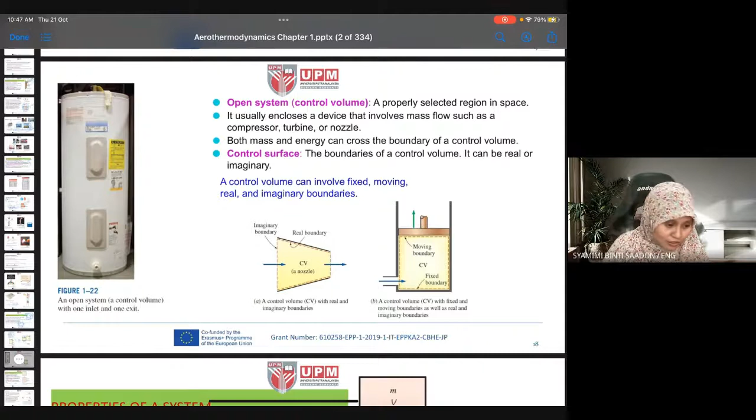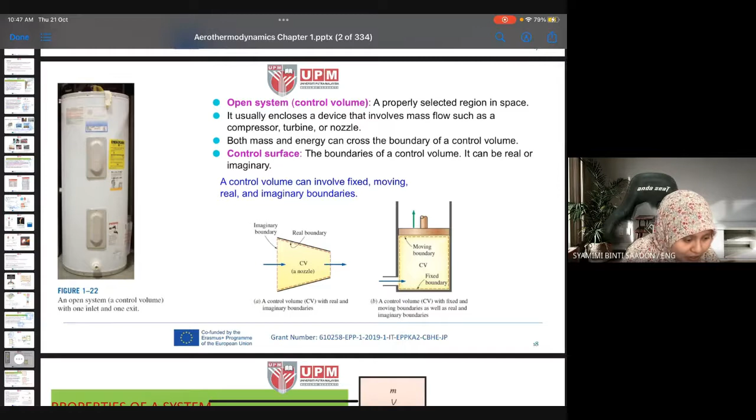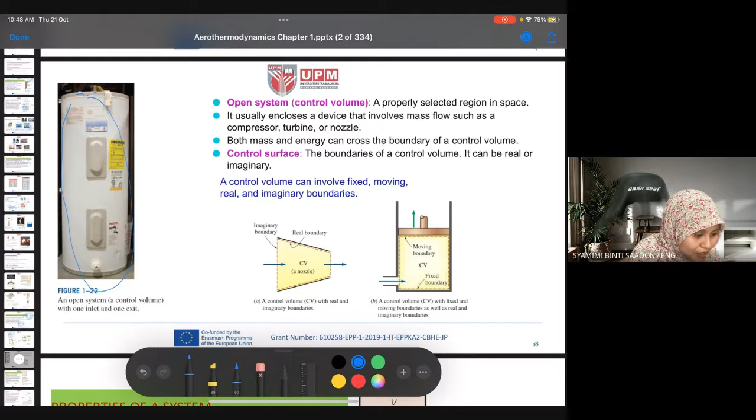So we continue about the open system. Open system is a control volume or properly selected region in space. I think this was already mentioned. For example here, what do we have? Like a tank, a gas tank. The tank is the system, but it is open, so we have to consider the change of mass fluid in and out of the control volume, one inlet and one exit. Means that if there is any fluid transfer, any mass, any particles, we have to take into consideration that part when we analyze the system problem. One inlet and one exit.

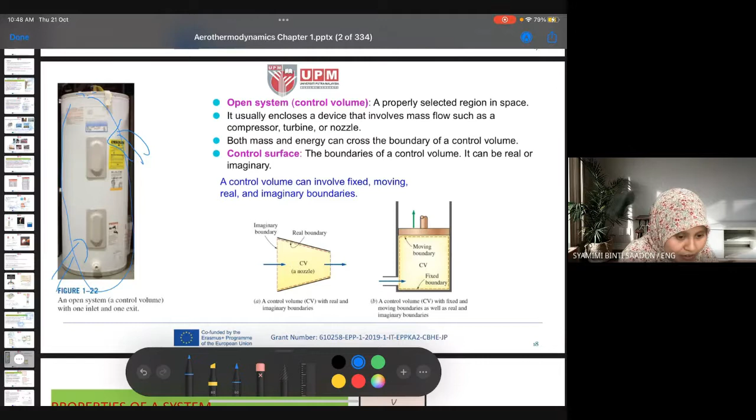And then mass flow. It usually encloses a device that involves mass flow such as a compressor, turbine, or nozzle. These are the main components in a thermodynamic cycle: compressor, turbine, nozzle. Even in aircraft engine cycle, gas power cycle, the main components are compressor, turbine, plus nozzle. Nozzle is to enhance the speed of the fluid to a high speed gas flow. So we need a nozzle.

So these devices, compressor, turbine, etc., are considered an open system, open control volume. Both mass and energy can cross the boundary of a control volume. So for an open system, both mass and energy can be exchanged, can cross. But for a closed system just now, only energy, no mass. Mass cannot be transferred or exchanged within the closed system. But for open, both mass and energy can cross the boundary of the control volume.

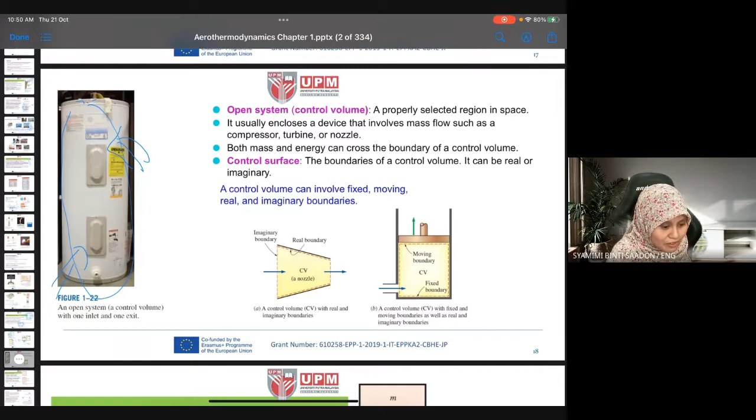And then we also call control surface the boundaries of a control volume. It can be real or imaginary. Control surface is same as boundary, just another definition. Control volume can involve fixed, moving, real, imaginary boundaries. These are examples: a control volume with real and imaginary boundaries.

For example, nozzle. Normally we design, sketch a nozzle like this, from a bigger initial area to a smaller area at the exit. Nozzle involves change of area, because if you remember the Bernoulli principle, if we change area, then the volume will change, the speed, the velocity will change. So that's why a nozzle has to have a different area at exit and inlet. So this is nozzle.

CV is control volume. And another one, B, for example, if you have a piston, for example combustion, a diesel engine, what do we call it? Internal combustion engine, CI engine, right? Internal combustion, ICE, internal combustion engine for a car, a vehicle. Sometimes it uses a piston engine.

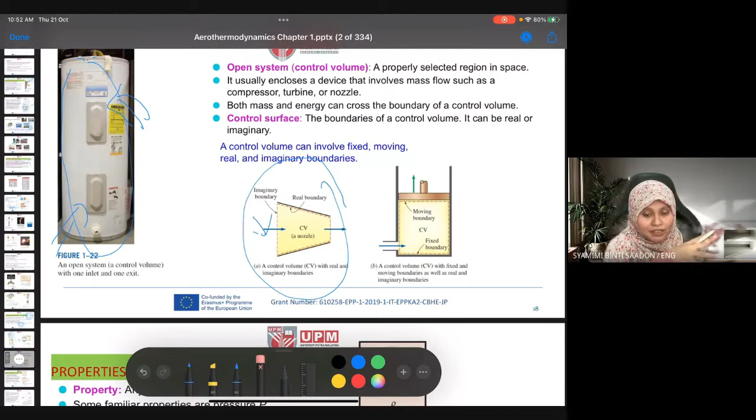And then properties of a system. This is also some of the units. So property and characteristic of a system. Some familiar properties: P, pressure, temperature, volume, mass. These properties or physical values that we are going to measure can be divided into intensive and extensive.

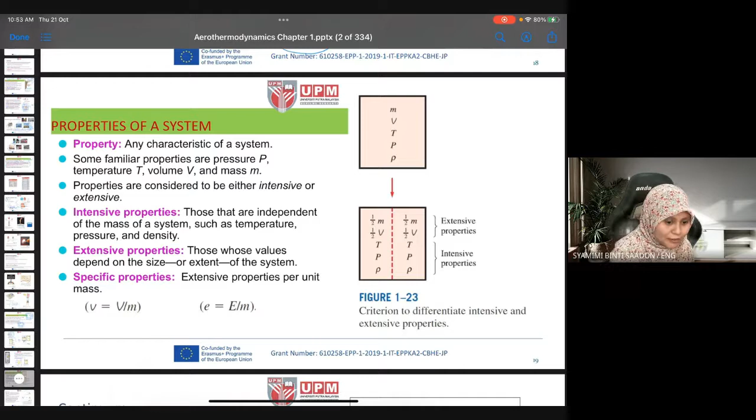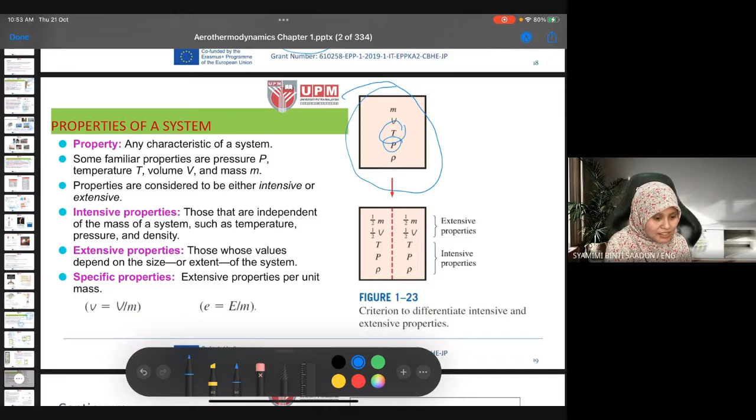This definition, at least you know it, but you don't have to remember. Intensive properties are those that are independent of the mass of the system, such as temperature, pressure, and density. While extensive, those values depend on the size of the system. So intensive: temperature, pressure, and density means that in a closed system, like a rectangular here, the temperature, pressure, and density will not change with the mass, meaning that if some of the mass is transferred out, some of the particles are transferred, the temperature, pressure, and density of this remain independent of the change of mass, while the volume and energy depend on the mass, extensive properties.

So there is another notation. When we write these extensive properties, we have to define whether it is in terms of mass, or it is the original default value. For example, volume here, if you write small v, it means it is in terms of mass, meter cube per kilogram. Otherwise, if you write capital V, it is just meter cube, centimeter cube, or milliliter.

This other value, enthalpy, you are going to use for first law thermodynamics. Enthalpy in small letters is joule per kilogram. But if you use big H, enthalpy is in joule. So these extensive properties are normally in terms of mass, per kilogram or per gram.

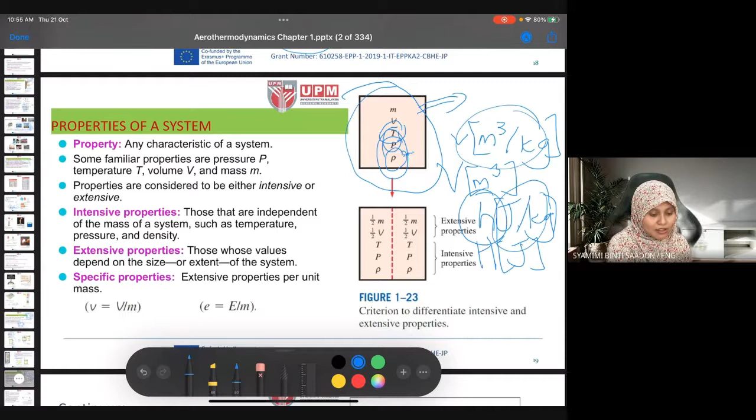So in our calculations we use a lot of this mass, these extensive properties. Normally the values are given in terms of the specific property which is in terms of mass.

If you have specific heat, CP, this is normally given in terms of mass, so we write it in small letter. The unit is joule or kilojoule per kilogram per Kelvin. But if it's in capital letter, it's joule per Kelvin. Normally we use the small letter version.

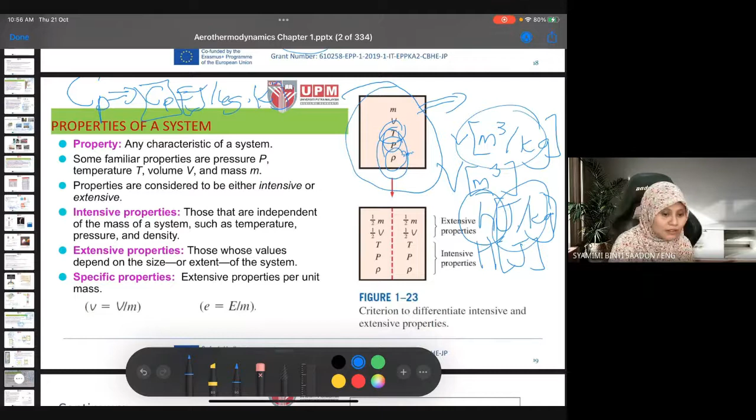This means that we calculate, measure, and analyze the system normally in terms of per mass, per kilogram mass. That's the normal calculation.

This one is okay, continuum, atom, let's pass. Sorry, I'll pass, maybe not really important for our topic.

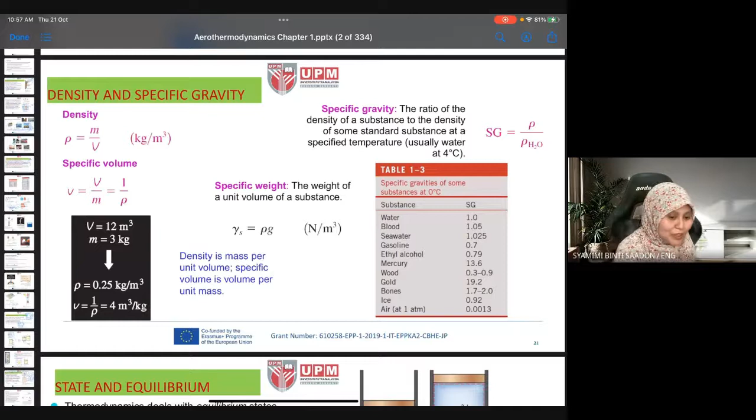Density and specific gravity. Density is mass per volume, kilogram per meter cube. And we call it specific volume when the volume is in terms of mass per kilogram. We write it as the small letter v, and we call it specific volume.

Specific weight, specific gravity, specific enthalpy, specific entropy - specific normally means in terms of per kilogram.

So this specific volume is actually the opposite of density, because it is written as volume over kilogram.

After this class I'm already getting confused. Okay, this is meter cube over kilogram, so this is the unit of specific volume.

So you can see this is actually the inverse of density. If you have the volume, for example, the problem or exercise gives you the value of the specific volume, you can calculate directly the density, just by taking the opposite, the inverse.

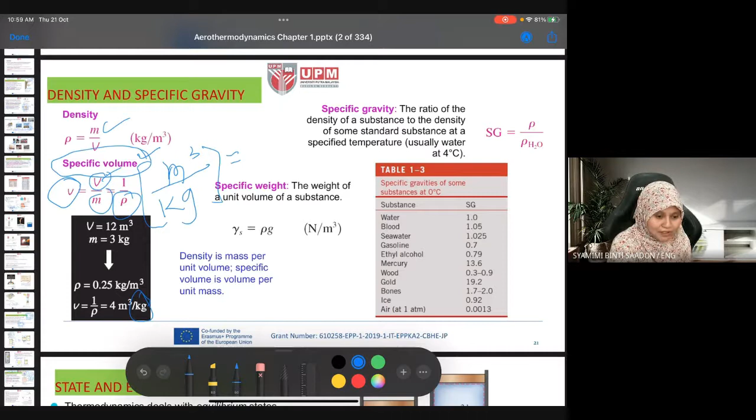Specific weight is the weight of a unit volume of a substance, written as gamma, but this is seldom used, we use it not quite often. Specific gravity is also rarely used, not quite often. Only specific volume is commonly used.

State and equilibrium. There are a lot of definitions for you today, but it's okay, it's just definitions. The most important part is that you know how to solve a problem. Definitions are just for your information.

State and equilibrium. Thermodynamics deals with equilibrium states. Of course, equilibrium is a state of balance.

So normally before we analyze a problem, like I mentioned, if you have exercises or exam problems to solve, you first consider: the system is what? What does the system include? It includes the piston, the cup of coffee, and the surrounding, etc. So that is the system.

And then you have to also state that the problem you are analyzing, the state or process, is in equilibrium, is in balance. Because otherwise, if we do not state and consider that the process is in equilibrium or in balance, you cannot apply some of the equations or principal laws.

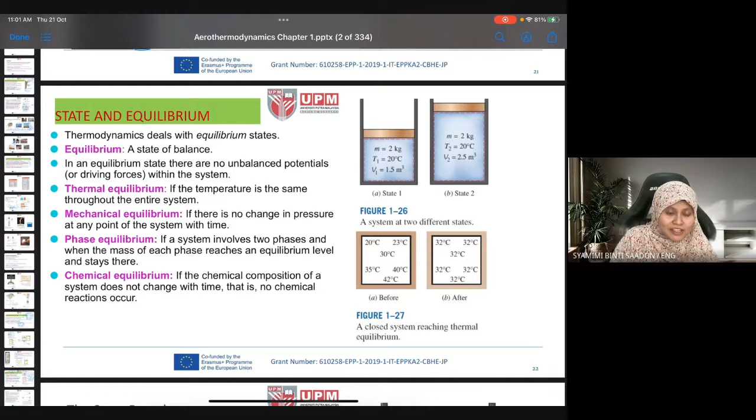If you don't state that, then other people may challenge you and ask whether there is a change of this or that in terms of the process.

But if you already state that the system is balanced, we understand that there is no change in, for example, the energy balance. There is no other system interfering. So you have to state that it is a state of balance. In an equilibrium state, there are no unbalanced potentials within the system. No unbalanced potential means that it is balanced.

Thermal equilibrium. So there is thermal equilibrium, mechanical equilibrium, phase equilibrium, chemical equilibrium. But normally if we state that the system is in equilibrium, we understand that thermal, mechanical, phase, and chemical are all in balance, so you don't have to state them one by one. Thermal equilibrium is when the temperature is the same throughout the entire system.

So when we say that we are studying the system where it is in equilibrium, we assume at a certain point, for example like this. Okay, you have to study again.

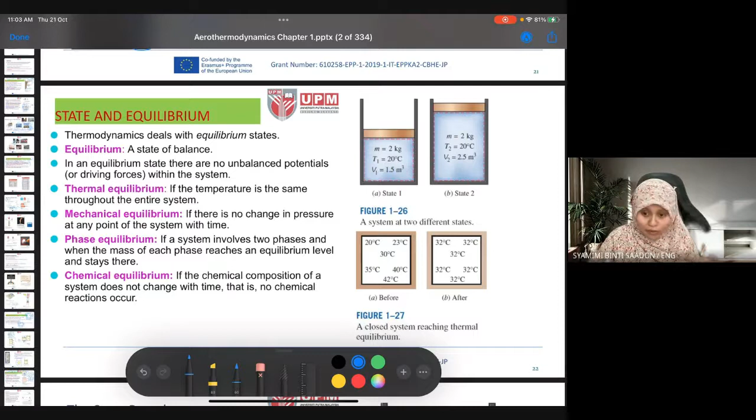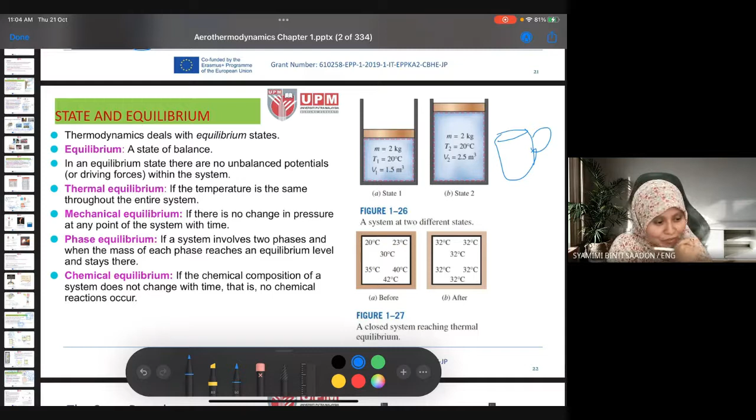It means that you have to state the period of time that you are going to focus on. Maybe the whole process of the phenomenon is throughout. Let me give an example: the cup of coffee. For example, you put the cup of coffee on a table in the living room for 5 hours.

But you want to calculate the amount of heat transfer from the hot coffee to the ambient, the surrounding room temperature. You want to study the process of heat transfer. Normally, in order to analyze the heat transfer from hot to cold, to calculate the total heat transfer between the cup and the surrounding, you have to define first that you are going to consider the process during maybe 5 or 10 minutes.

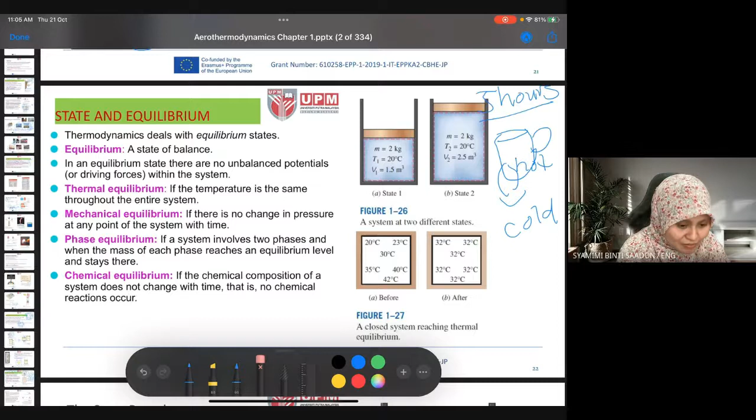For example, these 5 hours are from 8 a.m. to 1 p.m. You put the coffee on the table from 8 a.m. to 1 p.m., but you want to calculate the heat transfer. So you say that we consider the closed system in thermal equilibrium only during 10 or 15 minutes, maybe within 8:30 to 8:45 a.m. So you only consider the equilibrium state during these 15 minutes.

You only state that we consider the state in equilibrium within this period of time. It doesn't mean that the whole system doesn't change, but only for a small period of time we consider it as if it is balanced, because we want to analyze the process and calculate the energy. So the thermal equilibrium we consider is just within that 15 minutes, so that we can characterize and calculate the process.

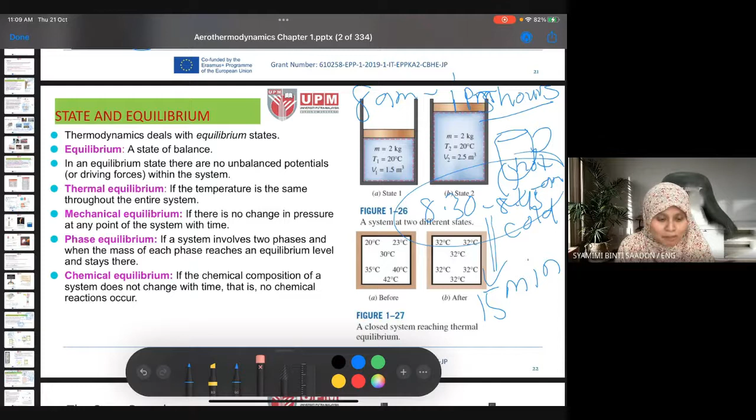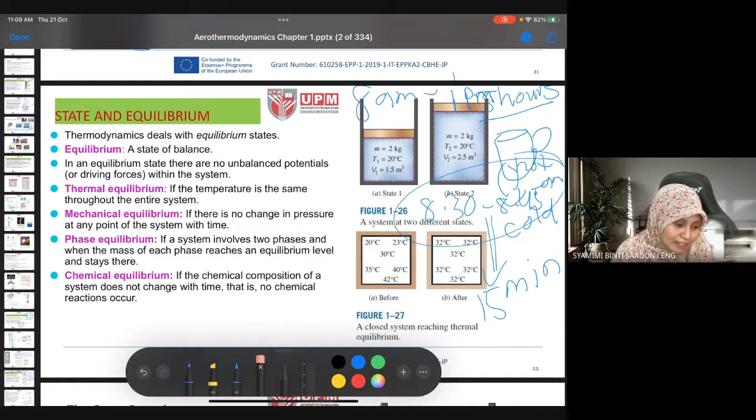Chemical equilibrium is if the chemical composition of a system does not change with time, no chemical reactions occur. During that state of equilibrium, we consider there is no change of chemical composition. Throughout the whole process, for example the 5 hours, there can be change of chemical composition, phase, pressure, etc. But at the particular time we analyze, we consider it in a state of balance. I hope you understand.

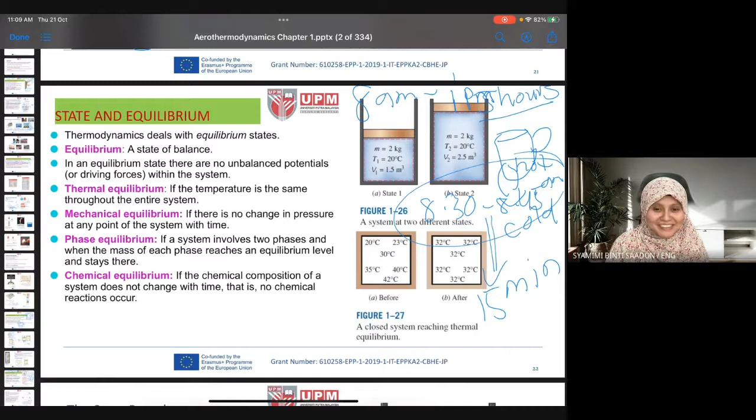Okay, doktor, faham. Okay.

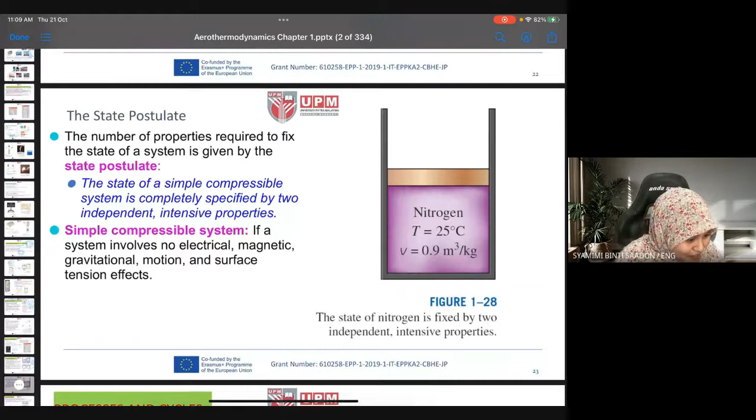State postulate: the number of properties required to fix the state of the system is given by the state postulate. Not really important. Okay, process and cycle. Ada berapa slide?

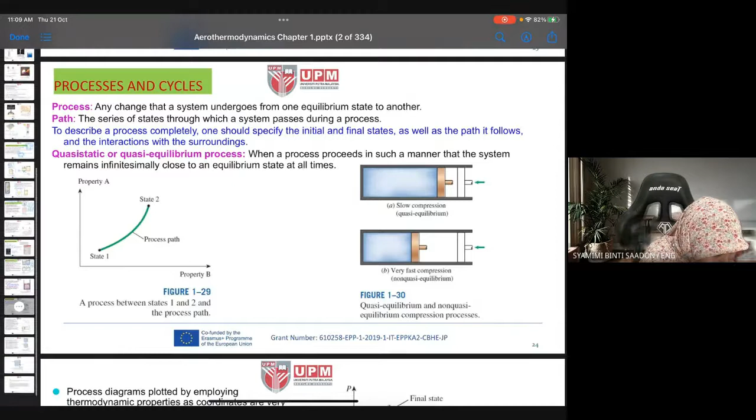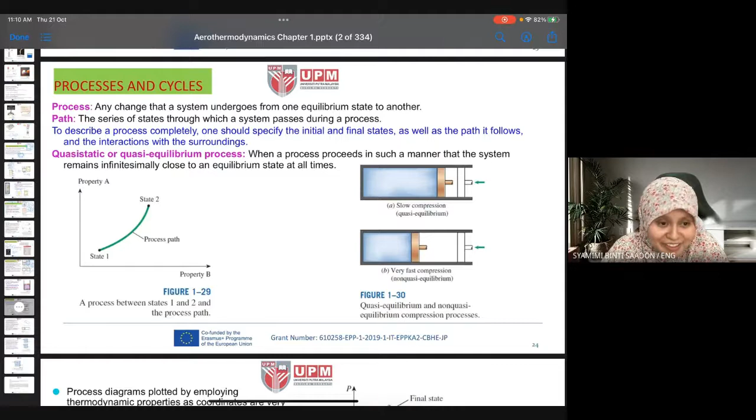Okay, process and cycle. Process: any change that a system undergoes from one equilibrium state to another. Okay, process. Okay, state, for example, from state 1 to state 2. Okay, this is simple to understand. So that is what we call a process.

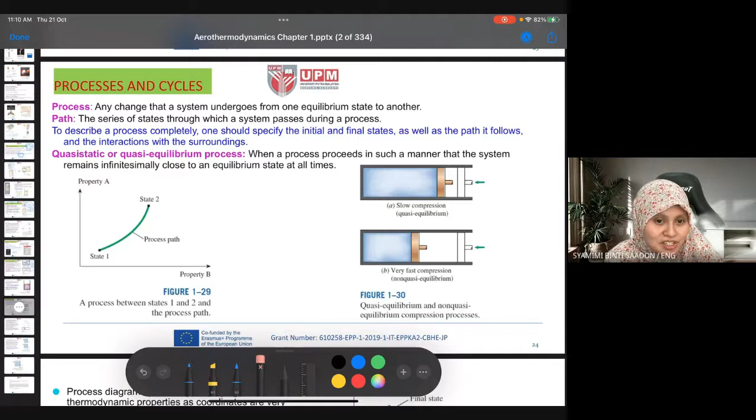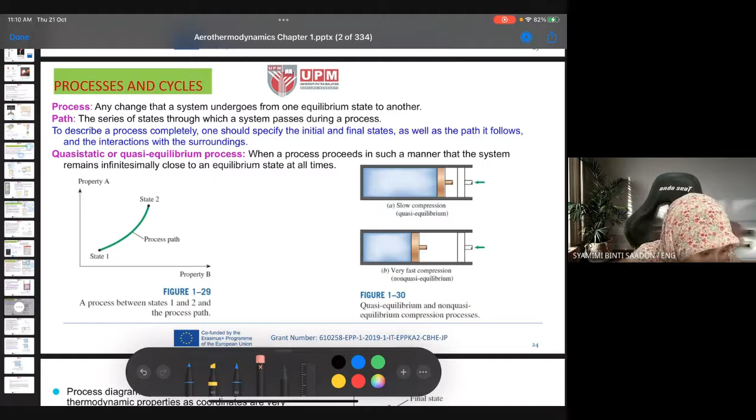Path: the series of states through which a system passes during a process. To describe a process completely, one should specify the initial and final state. Okay, this is in mathematics, right? You do engineering maths. So process from state 1 to state 2, right? Process. But the path, this is given the green line. This is, for example, the path one that you can take.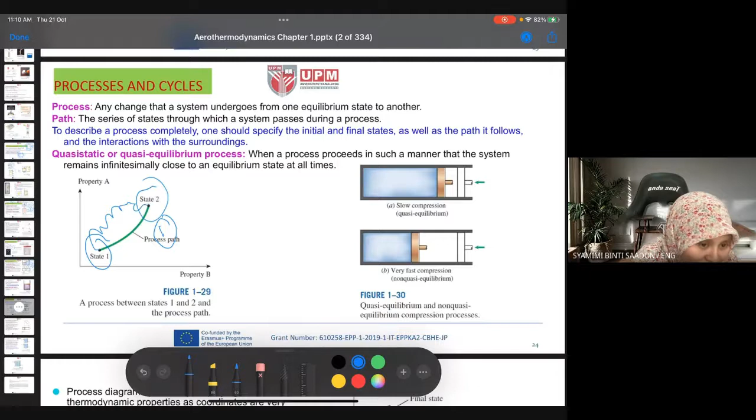So from state 1 to state 2, you can also have this path. So this is your second path. Or you can also have this path and arrive from state 1 to state 2. Okay, so that is path.

Quasi-static or quasi-equilibrium process: when the process proceeds in such a manner that the system remains infinitesimally close to an equilibrium state at all times. Sometimes we don't specify the process to be equilibrium, but we say that it is quasi-equilibrium, meaning nearly close to equilibrium. So when a process is in quasi-equilibrium, we still can apply all the laws the same as in the equilibrium state.

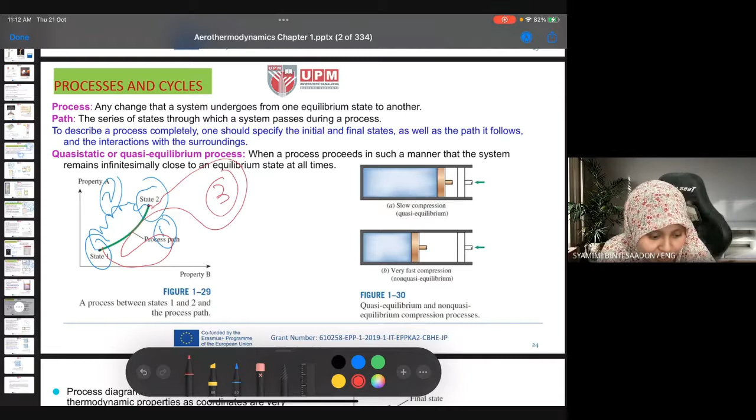So this one is used for slow compression and very fast compression. If we have a slow compression process, then we define very fast as non-quasi-equilibrium. So when we have a slow compression process, we compress the piston very slowly. When we want to study the process at a certain amount of time, we state that the process is in quasi-equilibrium, meaning we just want to capture a certain period of time of the process.

While if we have very fast compression, it's non-quasi-equilibrium, because the process is very, very fast. So we have to consider it as if the process is being stopped at one point. Difficult to explain, but if we classify a process as quasi-equilibrium, you can still apply the same law, the same principles, the same equation as in the equilibrium or balance process just now. So it's the same, okay?

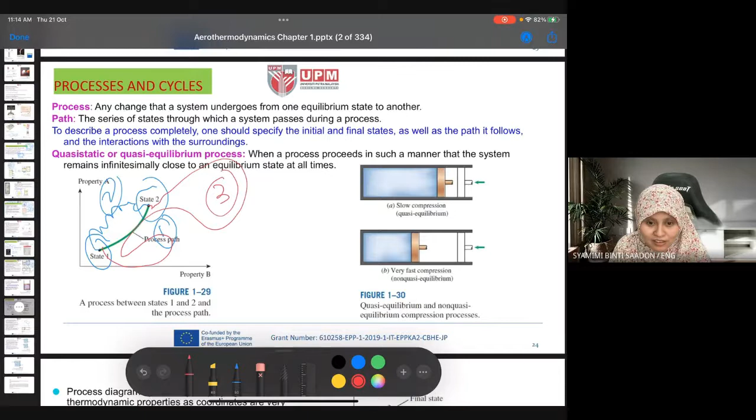Just that, depending on the types of process, sometimes it is hard to classify a certain process as simply equilibrium, because the process is very, very fast. For example, high speed gas flow: the movement of the fluid in gas power cycles is at high velocity. So we identify it as a non-quasi-equilibrium process. But it's okay, you can apply the same principles.

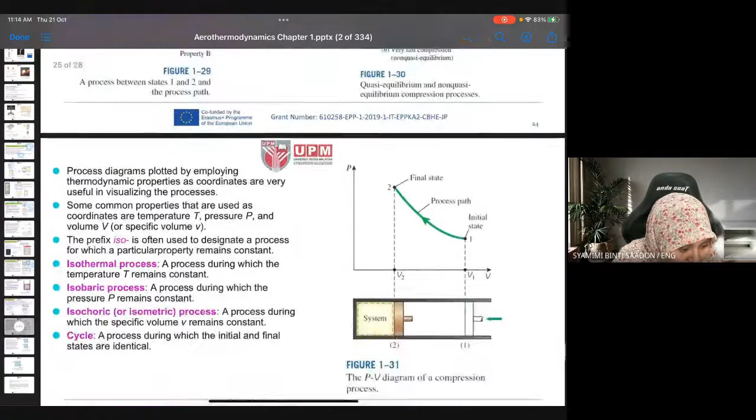Process diagrams plotted by employing thermodynamic properties as coordinates are very useful in visualizing the process. The prefix iso: there are some names we use to identify processes, and the one we usually use in thermodynamics is isothermal, meaning we assume the temperature is constant from 1 to 2. Isobaric means that from initial state to final state, 1 to 2, we consider the pressure constant, only from state 1 to 2, not the whole process. And isochoric means the volume is constant.

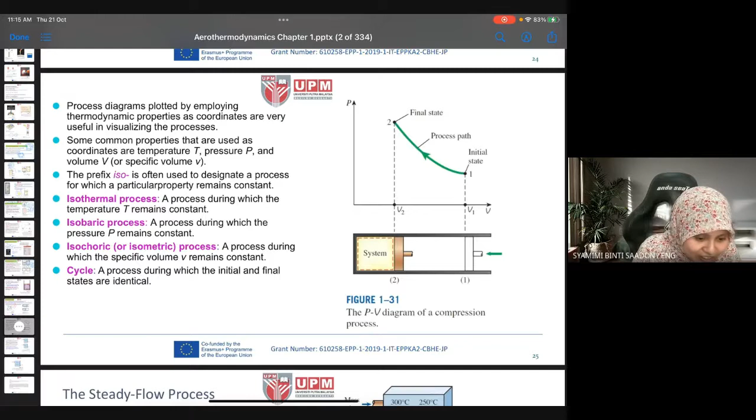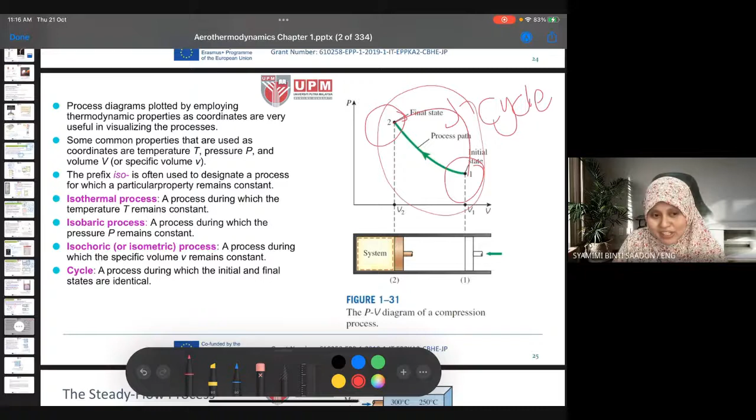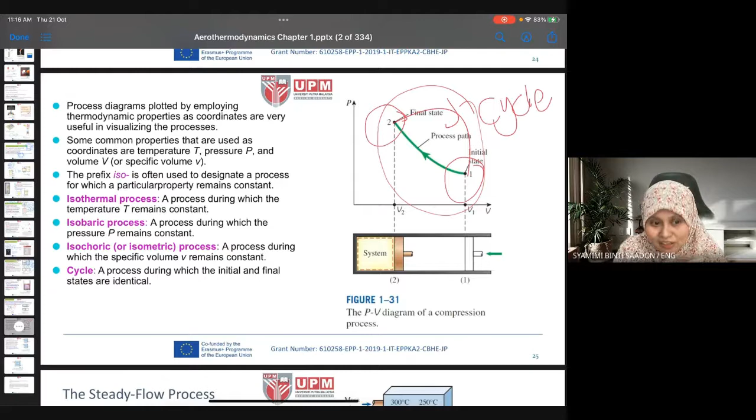A cycle is a process during which the initial and final states are identical. So this one from state 1 to state 2 is what we call a process. But if we have it complete like this, 1 to 2 and 2 back to 1, this whole thing is called a cycle, because you go back to the same initial point. That is what we use for a thermodynamic cycle. In order for the engine to run, the cycle is repeated, not only one cycle. Okay, next.

Okay, only two, okay.

The steady flow process. The term steady implies no change with time. The opposite of steady is unsteady or transient. Steady flow means that, at a certain period of time, all the values, like the temperature, are the same, like the energy balance and equilibrium state just now. We consider that the whole system, the whole control volume, is in steady form, meaning it doesn't change with time.

So for this, later on, if you have an energy balance equation in terms of the partial derivative, you learned this in engineering maths, right?

Okay. In terms of time, the partial derivative in terms of time, if the process is steady, this partial derivative will be zero. It means that there is no change with time. For example, if you have pressure here, the partial derivative of pressure in terms of time for that particular period, it's not that the pressure is zero, the change of pressure in terms of time is zero. You need to understand, not the pressure is zero, but the change is zero. There is no change, when we say that the process is steady.

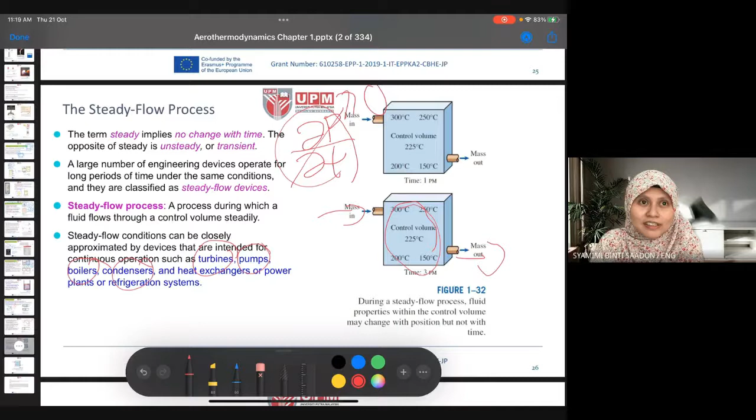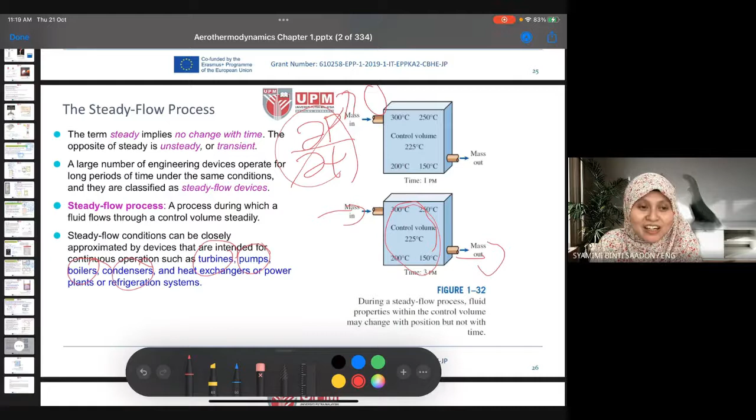But actually this is not real. The actual phenomenon that occurs in real life is that the process will never, or nearly never, be static or steady like that. Static, tak bergerak kan, no change, no movement. Actually in real life it won't be like that, but for engineers, for scientists, for researchers, if we want to study, to analyze a certain problem, we need to consider that the process is steady, that the process is in balance, etc. But in reality, it's not static like that.

So that's why in a more advanced study, we need to consider the dynamic change. But at our level, using a steady, static, balanced flow process is already enough for us to analyze the problem, to study. Okay.

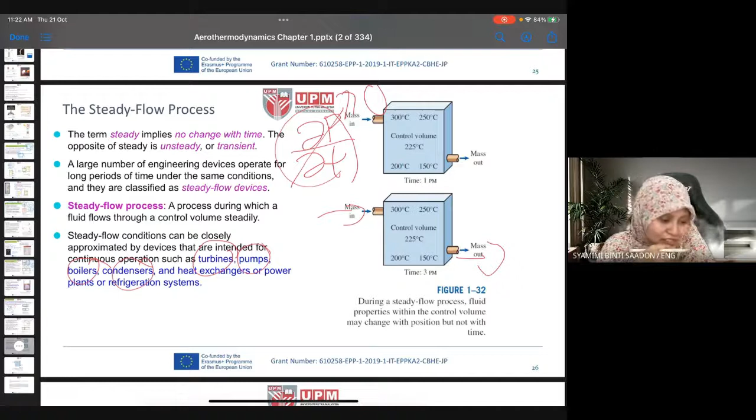So if in the future you're doing more detailed postgraduate research, for example, you cannot neglect this dynamic change. But for this level, bachelor level, steady flow is enough. Okay. Under steady flow conditions, the mass and energy content of the control volume remain constant.